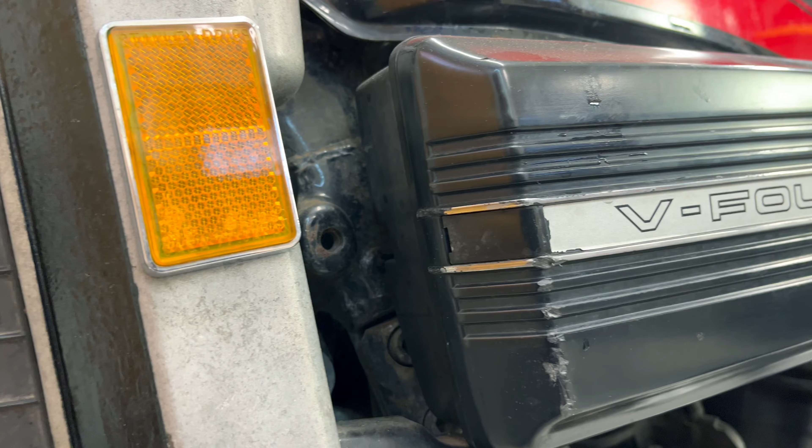Hi everybody! While changing the air filters on my old Honda here, I realized I was missing one of these protective caps on the air filter box. Even though it's there probably just for cosmetic reasons, I still want a replacement. But this bike being 40 years old makes it hard finding spare parts. So instead of looking for a replacement, I decided to print one myself, and it ended up costing me only 3 cents. In this video I'll show you exactly how I did it.

Let's move to the computer. Alright, we are on the computer and inside Fusion 360. I made this sketch on paper beforehand, just to make the work on the computer a bit quicker.

First thing we will do is add a user parameter. I will call it wall. It will be 1.5 millimeters. We add it as a parameter because we will use that a lot. Then we create a sketch.

We use the line tool, and read 19.3, and this one will be 17. This might be a bit hard to catch on camera, but this corner up here isn't straight - it has a bit of a curve. So I will use the line tool, put it somewhere like this, and then use a 3-point arc. Something like that. Then we need to create this cutout here.

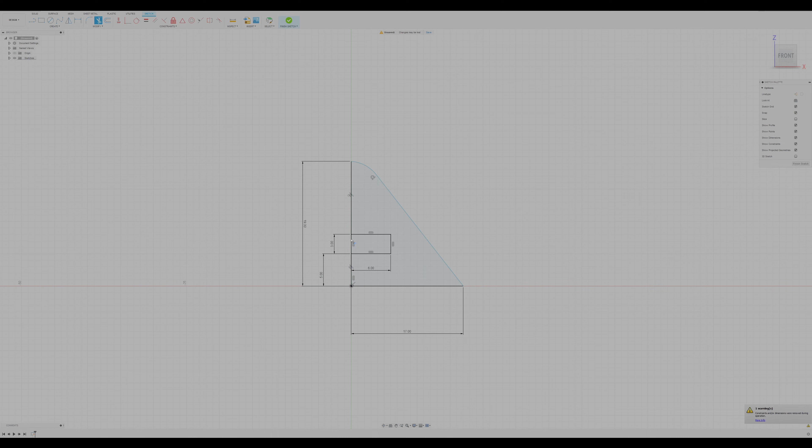It'll be 6 millimeters deep and 3 millimeters wide. Then we use the sketch dimension tool and put that to 5. Then we use the trim tool to remove this part here. And the sketch is done.

Now we will extrude this by wall. And that's our first wall.

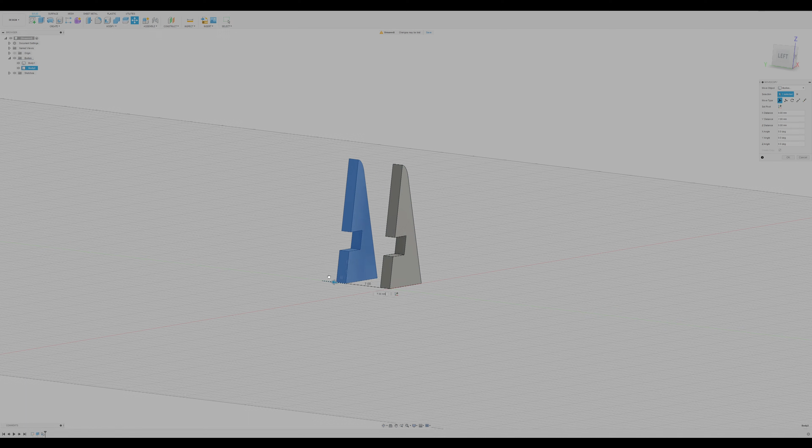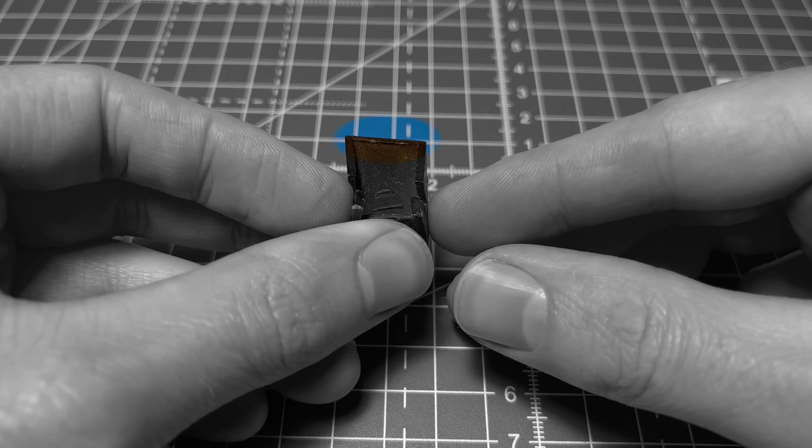Now I want to make a copy of this. I will use the move tool and check the create copy, and we will move it 15.5 millimeters plus wall. Another detail that might be hard to catch on camera is that this part right here is actually a bit skewed, so I will move this one up by 2 millimeters. Something like that - you can see there is a bit of an offset here.

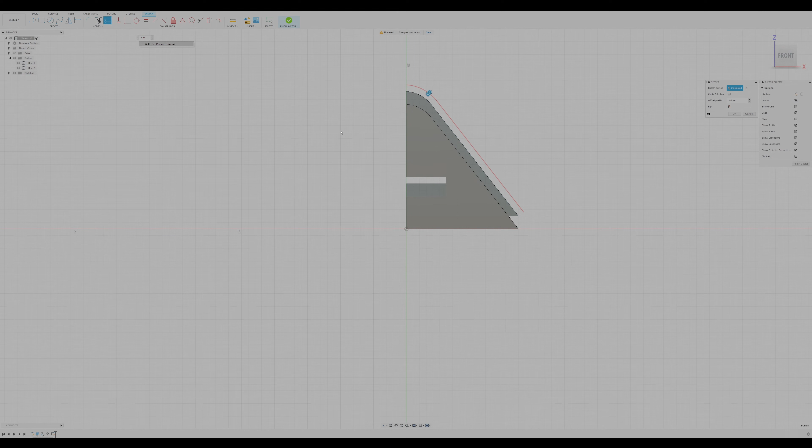Then we'll create a sketch, and we will use this line and offset it by negative wall. It's done, and here we will create another sketch. Use that line and offset it by negative wall again. And the sketch is finished.

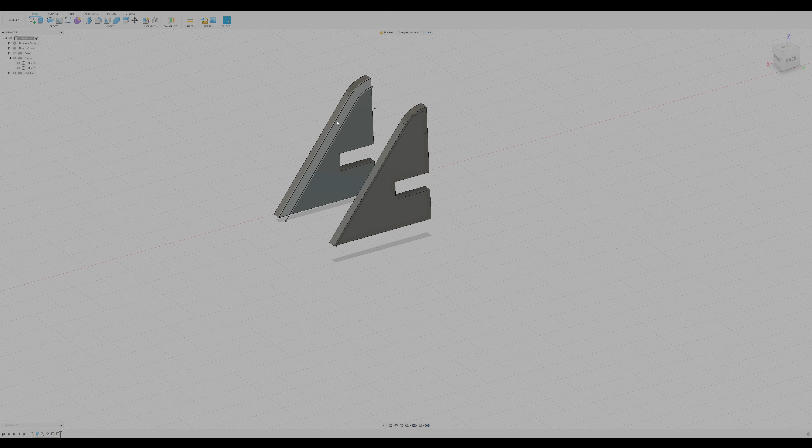Now we'll select that part and we will use the loft tool, and we'll set it to join. Something like that.

Now we will make this part here, right here. We'll start off by creating a sketch on this plane. We'll add a square. I want it to be 10 millimeters long.

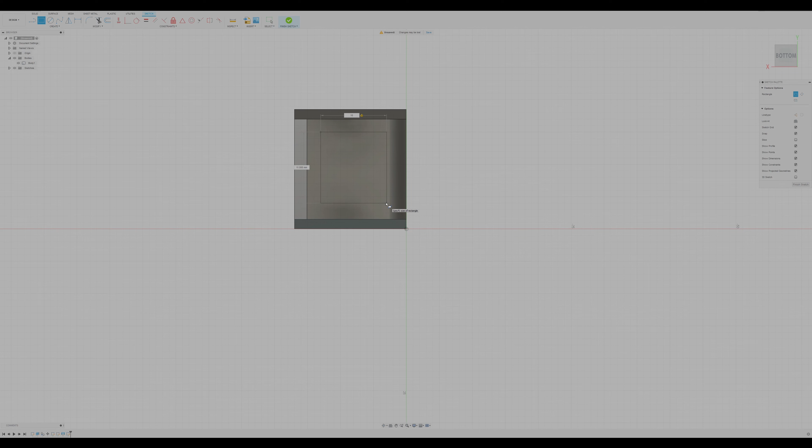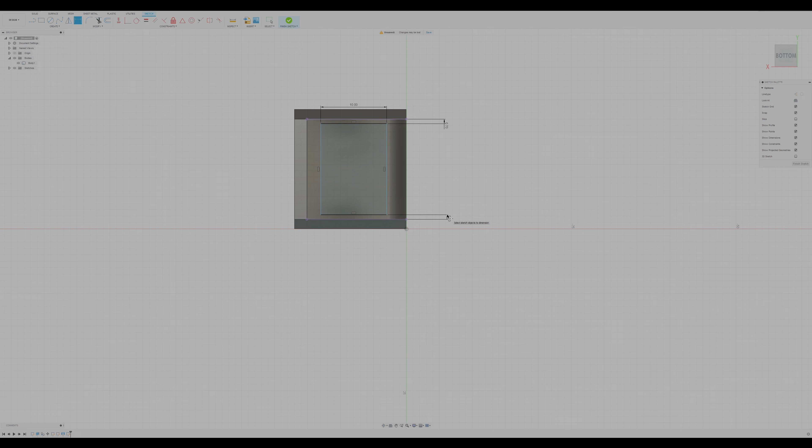And then we will project these two lines here. I'm going to use the dimension tool, and that will be 0.7. Down here we'll do the same thing, 0.7. Something like that.

Now we'll extrude that by wall, and we want to create a new body. Something like that.

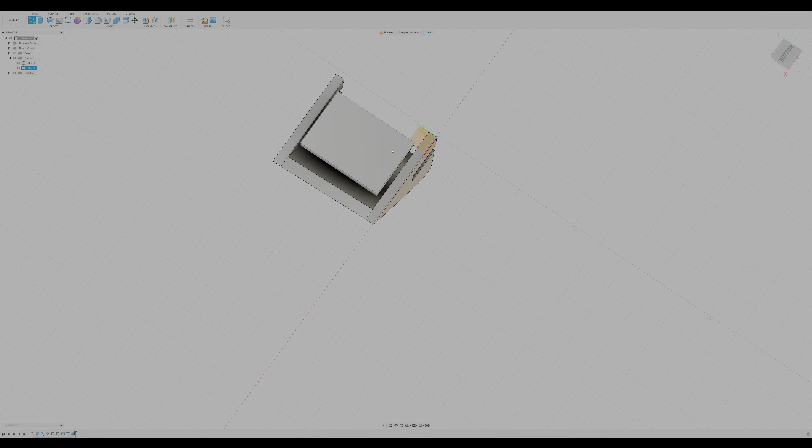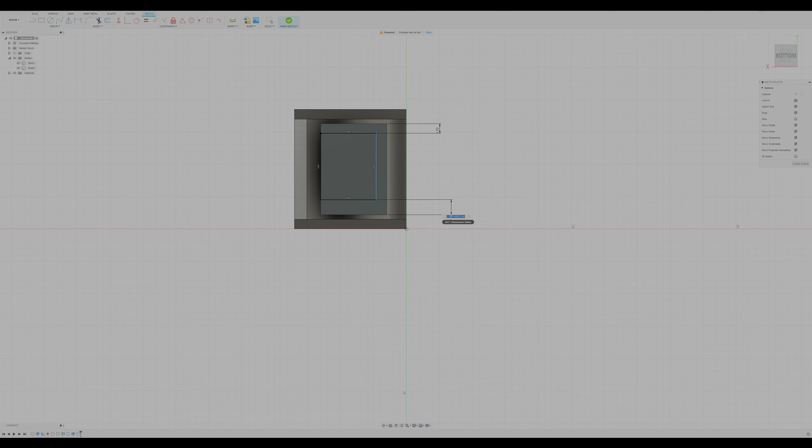And now we will do this little recess right here. Create a new sketch, use a rectangle, like that. Then the sketch dimensions - that to be 1.5. And down here the same thing, 1.5. And we'll make a circle and do the 3 tangent circle.

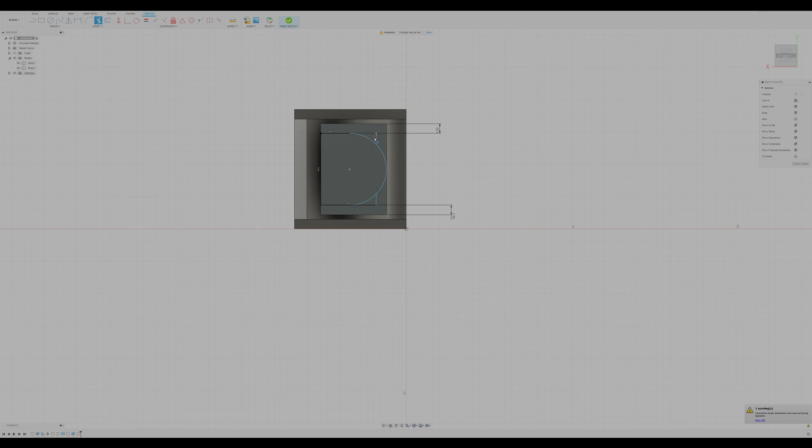There to there, circle, and we will place it like that. Then we use the trim tool to remove all these extra lines. Something like that. And we'll extrude that by -1 millimeter.

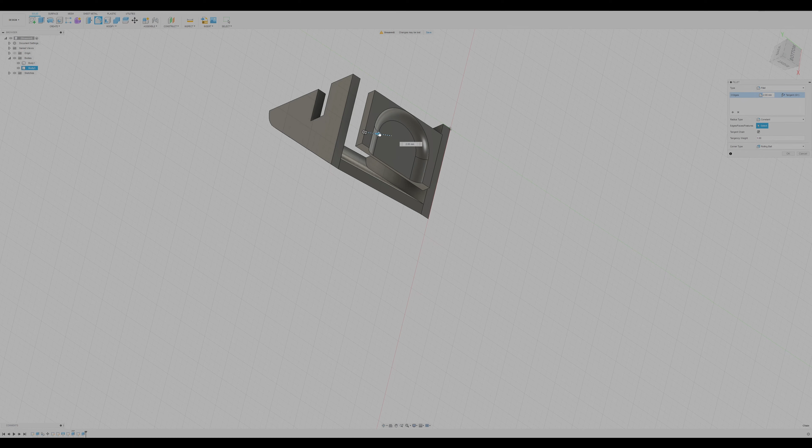Then I will select these lines here, and I will use the fillet tool. Just drag that out. Something like that. As you can see, this part is just floating in mid-air, so we'll have to move it.

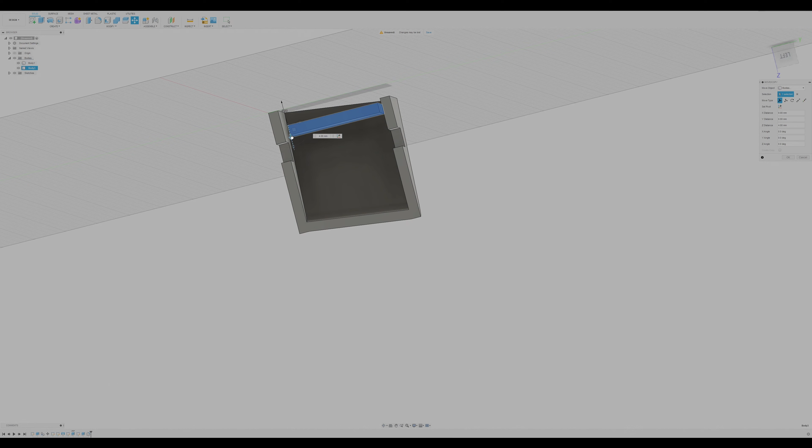Maybe we'll move it down by, let's say, 5 millimeters. We will move it outwards a bit as well. Something like that. Now we'll need to connect this to the other part, and we'll just do a simple extrude like that.

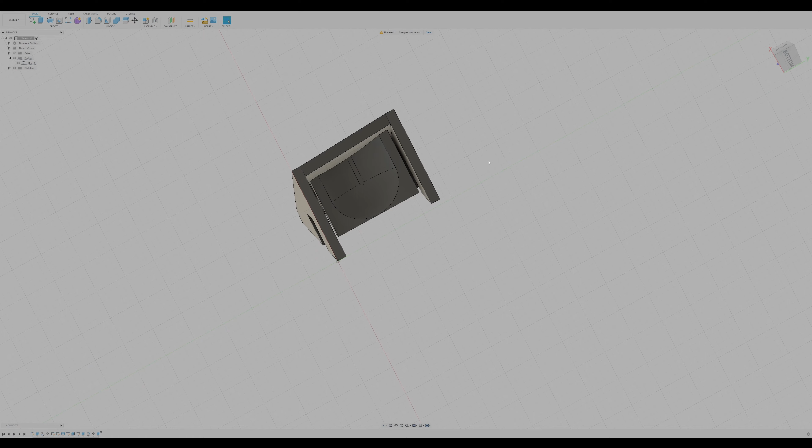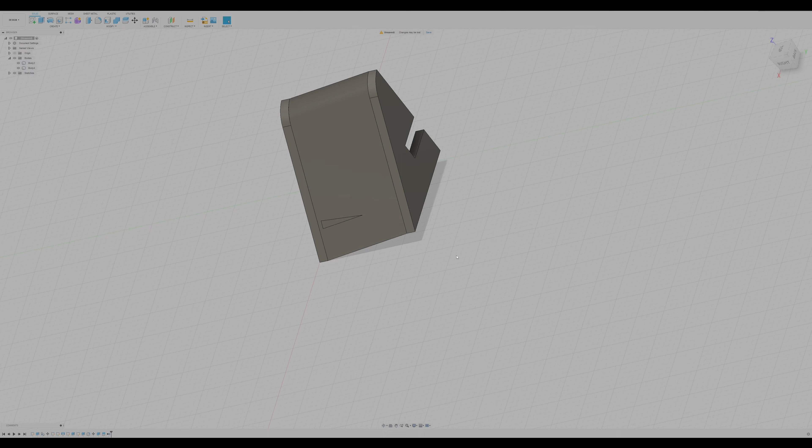Now you will see that it actually poked out on the other side, but that is easy to fix. We use something called split body - we select the body, select this face, and press OK, and this is actually a new body now. We can just go in here and delete it, and it's gone. It did shave off this part as well, and we can just join that back to the body.

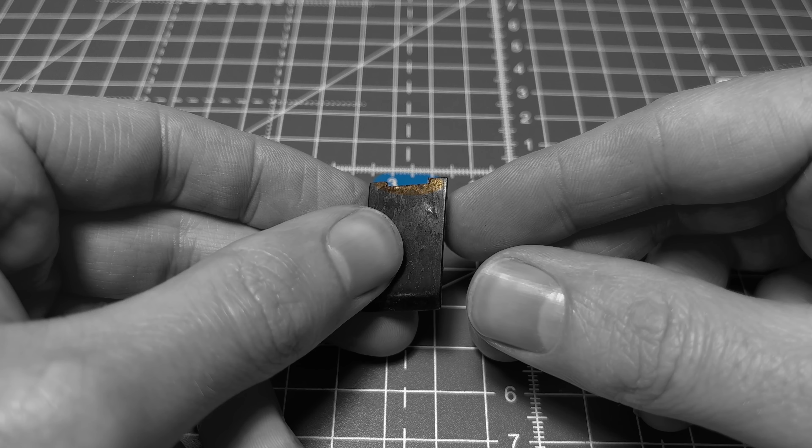The last part is creating this little hole right here. We will create a new sketch on this plane right here, and we will project this line in the back. Then we will use the line tool, find the center of this line, and make a line that is 4 millimeters that way, and then another line that is 4 millimeters in that direction.

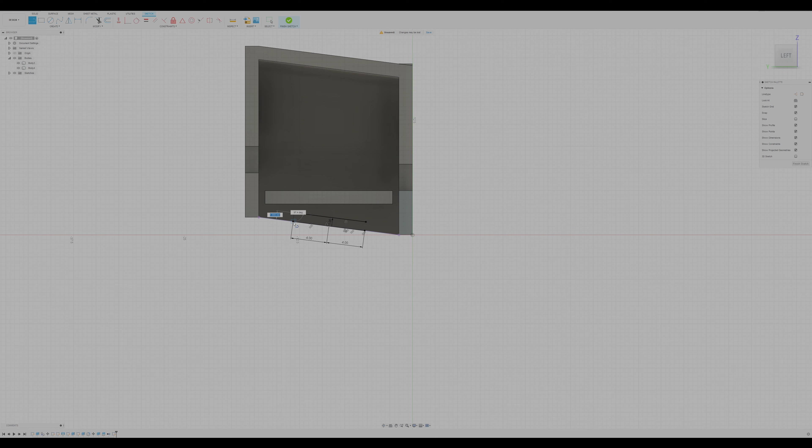Then we can select these two lines and make an offset by -1 millimeter. Then we can just do 2 tiny lines to connect them, and the sketch is done. We select it, and extrude it backwards, infinity, and set the operation to cut. And there we have it - the hole is there. And the piece is actually done.

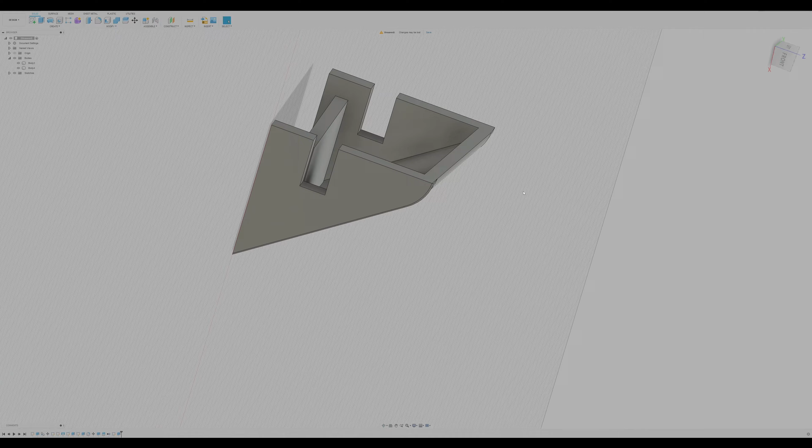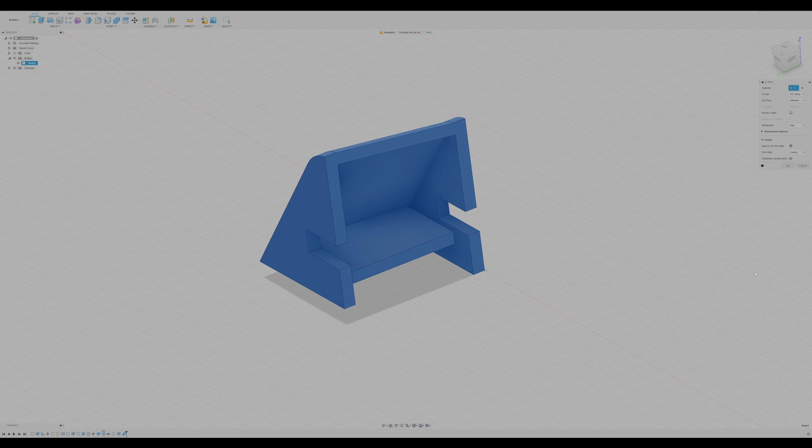The last thing I will do is combine these two bodies into one. Now we're ready to send it to the printer. We select the body, and send it to PrusaSlicer.

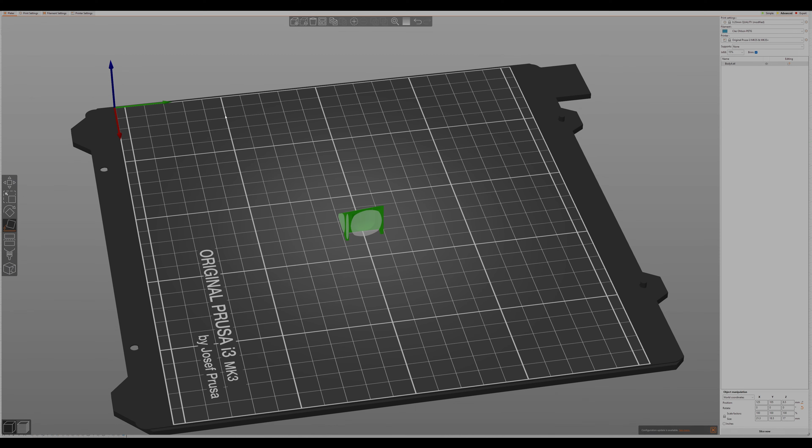Here we are in PrusaSlicer. I want to position it on that edge. I also want to add some brims to it, because this part is so small that I think we'll have a problem with it not sticking to the printer bed. Like that. And we will slice it.

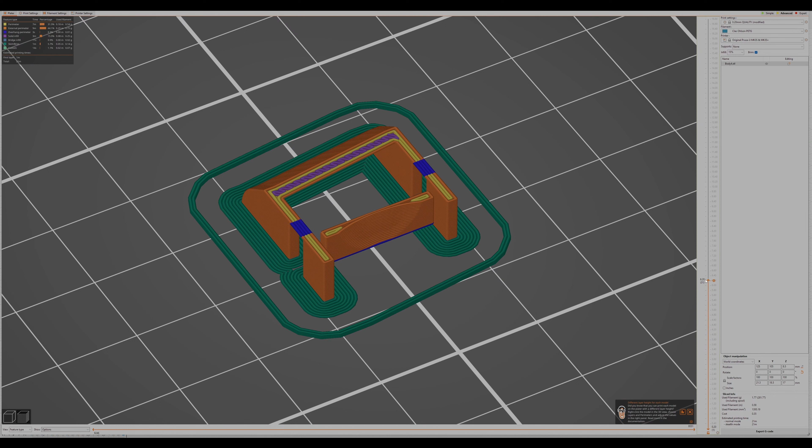Looks fine, except for one part, right here. You can see that this is actually printing in mid-air, and that is impossible to do. What it can do is print a bridge, like this one right here. So we have to turn this part right here into a bridge.

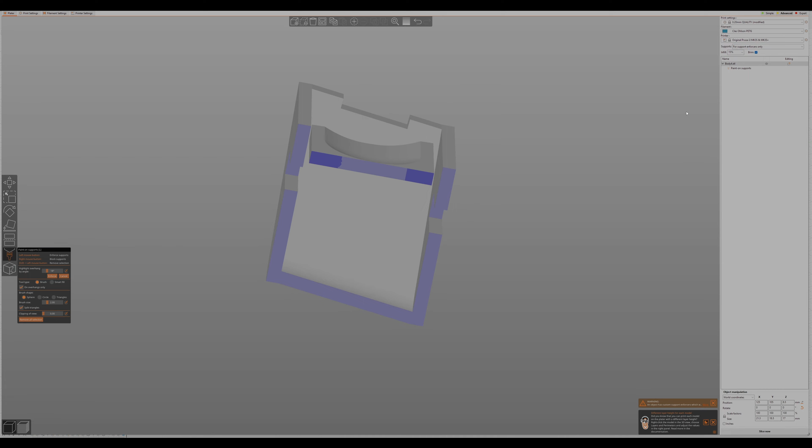Let's go back, and we use the paint on support tool, make it highlight some overhang, and select only paint on overhangs, and we just do 2 pillars right there, and we will activate the support enforcers, and slice again, and now we have small supports that will turn this floating island into a bridge. Perfect. I will export the G-code and send it to the printer.

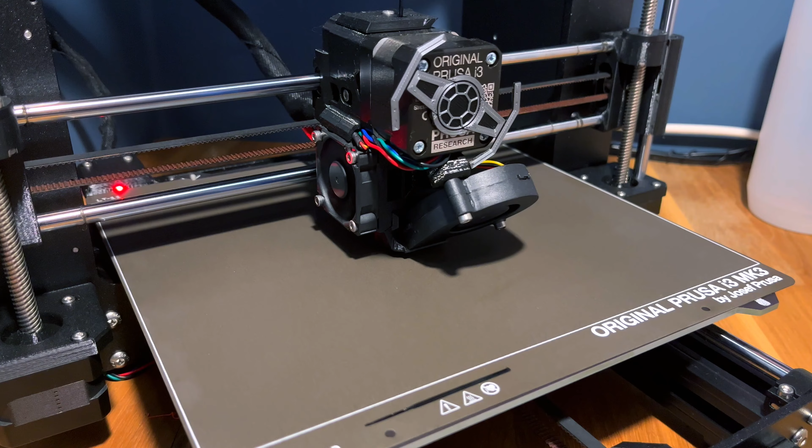Now the print is ready. I will just pop it off. I will remove the brim and supports, and we are ready to install it.

There we have it! It fits snugly, blends in perfectly, and I'm super happy.